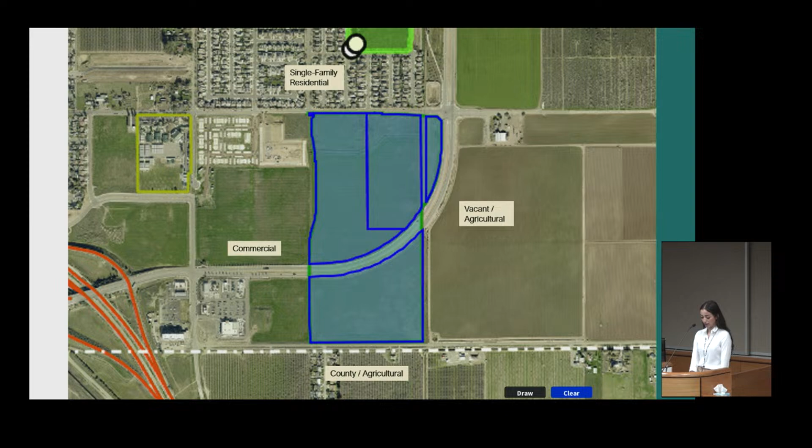This map shows where the project is located at a city-scale context at the southwest quadrant of the city limits. Here is a closer map of the location. As mentioned previously, it is located at the southwest corner of East Gerard Avenue and Campus Parkway. The site is approximately 73.7 acres with agricultural uses to the east, south, and some to the west, some commercial to the west, and single-family residential to the north.

The subject site was annexed into the city in 1999 as part of the Lyons annexation. This annexation incorporated a total of 565 acres into the city limits. The subject site has a current land use designation of business park and manufacturing/industrial and has remained vacant for many decades.

Next, I'll go over the entitlement applications for this project and what each is for.

The Planning Commission has the authority to make a recommendation to the City Council for General Plan Amendment number 2403, which would change the land use designation of the proposed residential areas from business park and manufacturing industrial to low-medium density residential and high-medium density residential. Establishment of Residential Plan Development number 83 would establish a new residential plan development for this area, and Zone Change number 435 would change the proposed residential areas to Residential Plan Development number 83.

The Planning Commission can make final action on Vesting Tentative Subdivision Map number 1333, which is to subdivide the 2 commercial parcels, park areas, and create 570 residential lots, and Environmental Review number 2430, which is a mitigated negative declaration.

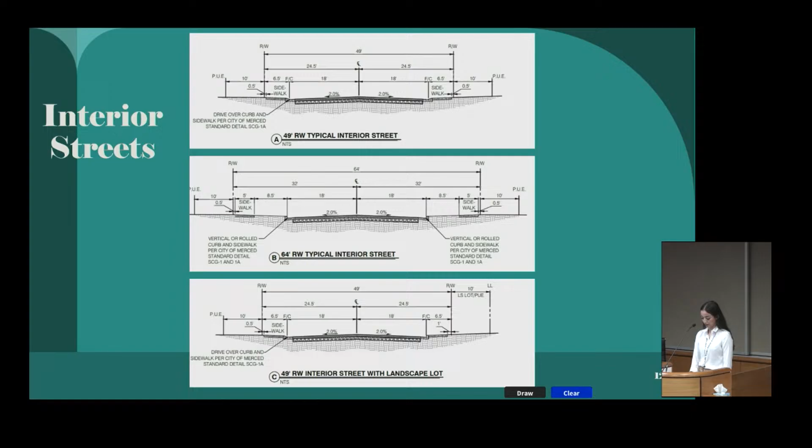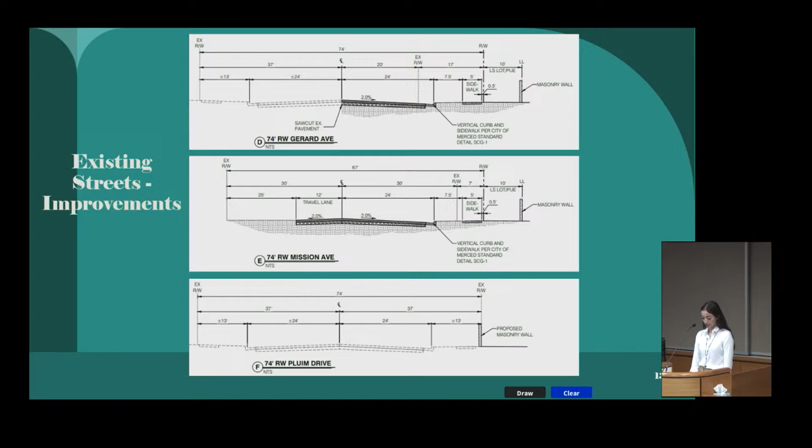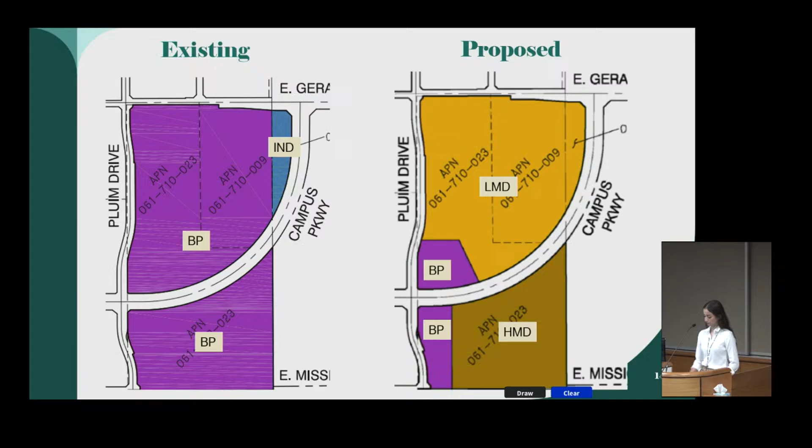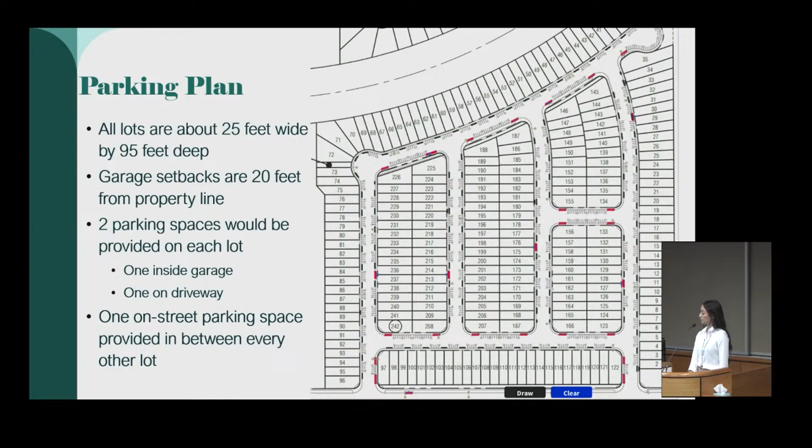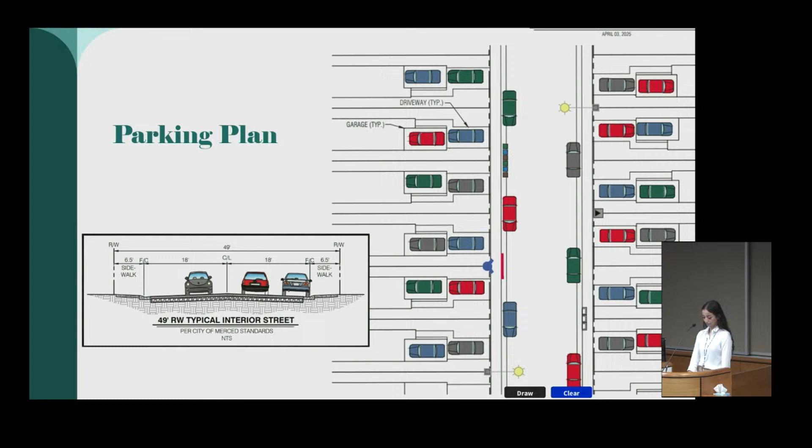The development standards for the low-medium density residential portion of the proposal would include single and two-story single-family detached homes with a maximum height of 32 feet. Each home will have at least a 2-car garage and 2 18-foot deep parking spaces for a standard size vehicle in the driveway. The house should have setbacks of 10 feet at the front yard, 5 feet at the interior side yard, and 7 feet at the rear yard.

The development standards for the high-medium density residential portion of the proposal would include 2-story single-family detached homes with a maximum height of 32 feet. Each home will have at least a 1-car garage and 1 18-foot deep parking space for a standard size vehicle in the driveway. The house setbacks include 10 feet at the front yard, 5 feet at the interior side yard, and 12 feet at the rear yard.

Both low-medium and high-medium density lots would have a 6-foot tall privacy fence between each home. These fences must not block the clear vision triangle of a public right-of-way or a driveway.

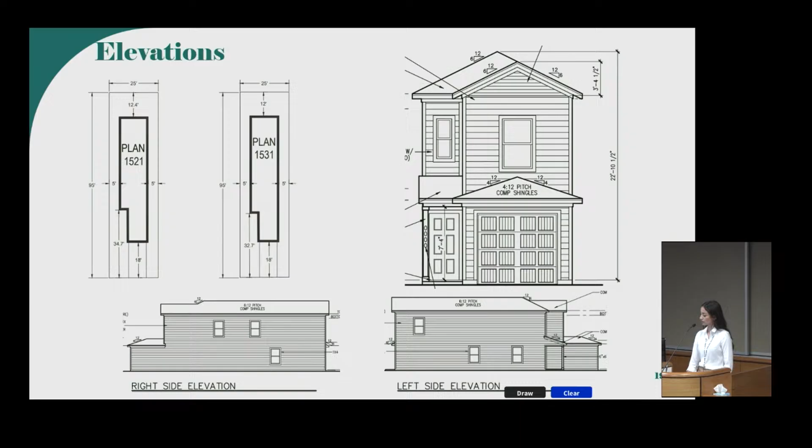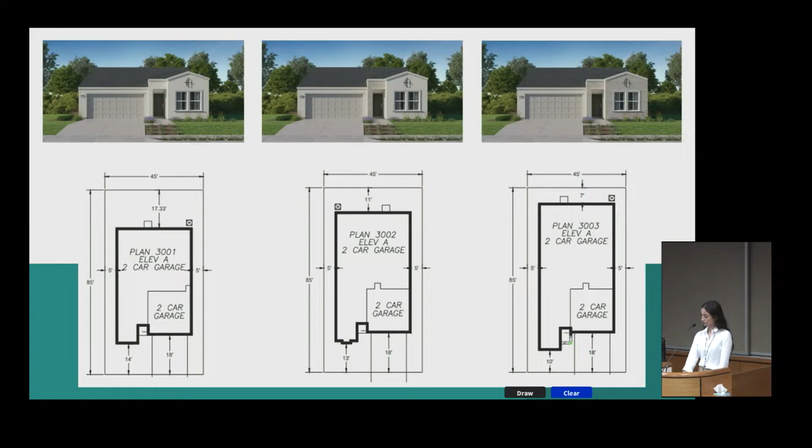Here we have more elevations provided for the 2-story, 2-car garage homes that would also be located north of Campus Parkway.

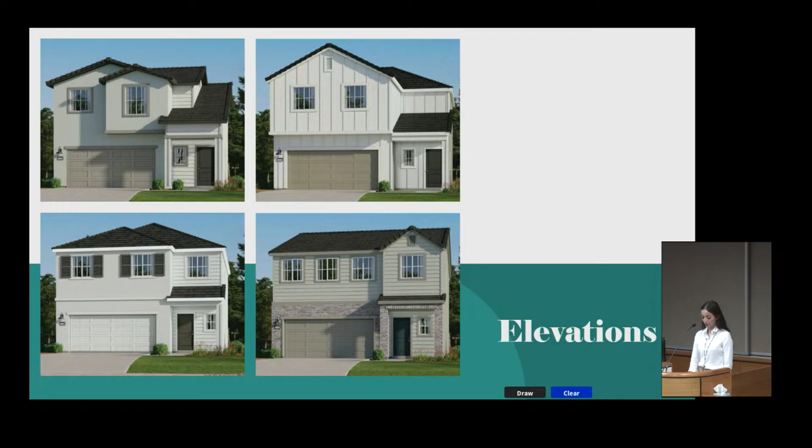Some of the impacts the neighborhood may have if this project were to be approved would include vibration and noise during construction. To limit this impact, staff has added condition number 39, which restricts construction hours to not take place between 7 p.m. and 7 a.m. Condition number 37 was also added to require an approximate 7-foot tall block wall along arterial and collector roads to mitigate noise levels from the roads to the neighborhood.

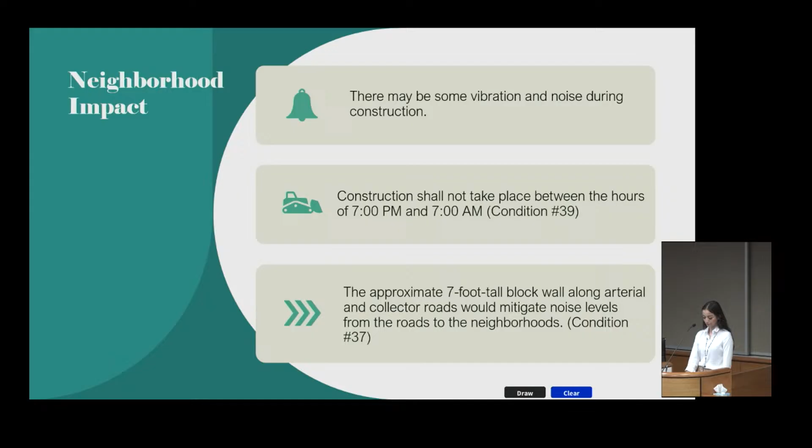Some of the notable conditions included in the admin report include condition number 15, which requires the developer to address general stormwater drainage on site unless approved by the city engineer or their designee. The developer would need to submit stormwater drainage plans and agreements, if applicable, with their final map application, all to be approved by the city engineer.

Condition number 35 reiterates that the vesting tentative subdivision map does not become effective until the general plan amendment, zone change, and establishment of residential planned development are approved by the city council. And condition number 44 states that any modifications to the street parking plan shall be reviewed by the Director of Development Services or designee.

There was also some changes to other conditions that Johnny will go over now. Thank you, Valeria. Staff met with the applicant, and we were able to work through a couple of the condition changes that I want to bring before you tonight.

So for condition number 7, we're going to change the condition so that the project shall comply with all requirements of the California Building Code and FEMA NFIP regulations for building and structures in special flood hazard areas.

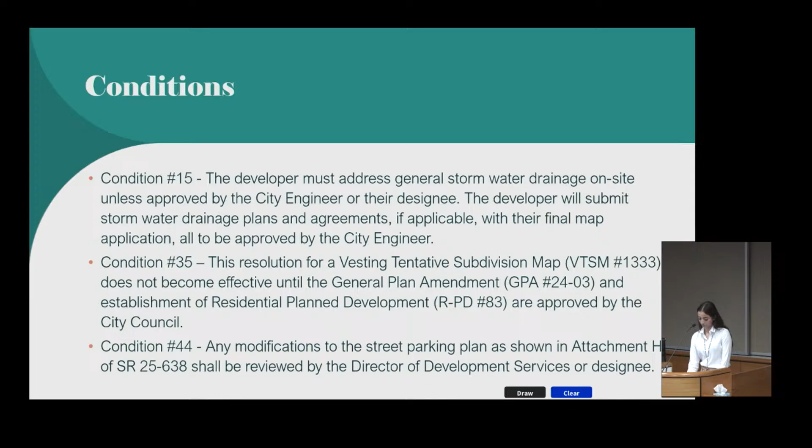After opening the public comment period, the Planning Commission may recommend the approval, modification, or denial of General Plan Amendment number 2403, Establishment of Residential Planned Development number 83, and Zone Change number 435. The Planning Commission may approve, modify, or deny Vesting Tentative Subdivision Map number 1333 and Environmental Review number 2430, which is a mitigated negative declaration. The approval of these applications is contingent upon City Council approval of the General Plan Amendment, Zone Change, and Establishment of Residential Planned Development.

That now concludes staff's presentation. I am available for any questions, and the applicant is also here.

Thank you, Valeria, for going through the presentation. Are there any questions for the project planner from the commission? Not at this time. I had one. Anybody have any questions? Okay.

Well, I have a question. I just wanted to, if you can, go back to the slide. I'm not too sure if it was in there. It said that there were some park areas. I couldn't really see where they were outlined on the grid.

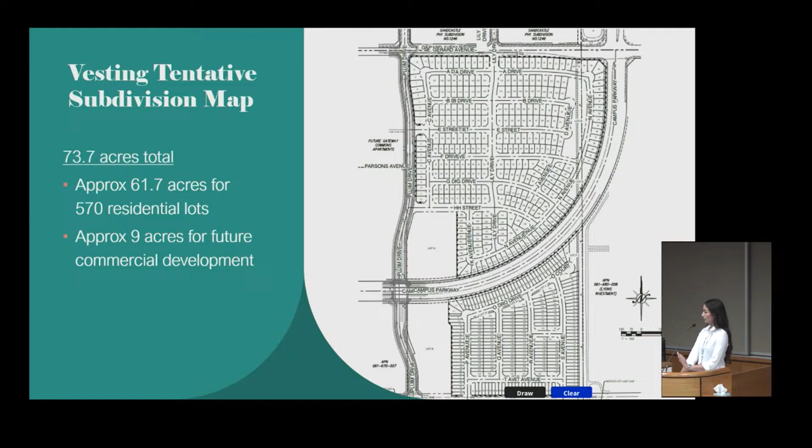So north of Campus Parkway, I'll divide it in two since the project is kind of divided, to make it easier to see. The park is at the northeast, in that kind of telephone shape. And there's a smaller portion south of that. This is the park area here. And then at the southern portion, it is Lot F at the top right corner, here.

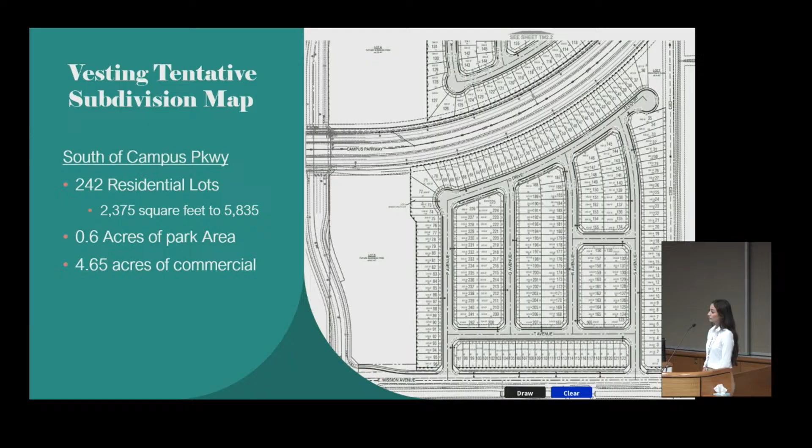Okay, perfect. Commissioner Swigert? A quick question. Are the park dimensions the same from the original commercial standing to now, as they want to rezone it for residential? Are they the same size as far as the dimensions? It's a half an acre, a little over half an acre to the south, and an acre and something to the north. I just want to make sure they're the same size.

They haven't been reduced. There are currently no parks located specifically on these sites. This is the first proposal we've had for this site in a long time, so the parks you see proposed are the parks they are planning to build. I guess my question was, was there anything proposed for parks prior to this?

Do you mean proposed to staff prior to this? Correct, pending. When it was zoned for commercial, was there any of the land set aside for parks? No. That's all I was asking. No, okay.

Commissioner Greggins: Since the topic of parks came up, I think our general plan says the parks must be developed at the same time as the project, right? But do we have any actual time limits on that, regarding whether it will be before permits, before model homes are built, before the first occupancy? Because we see a lot of previous developments where parks are kind of left waiting out there in the wind.

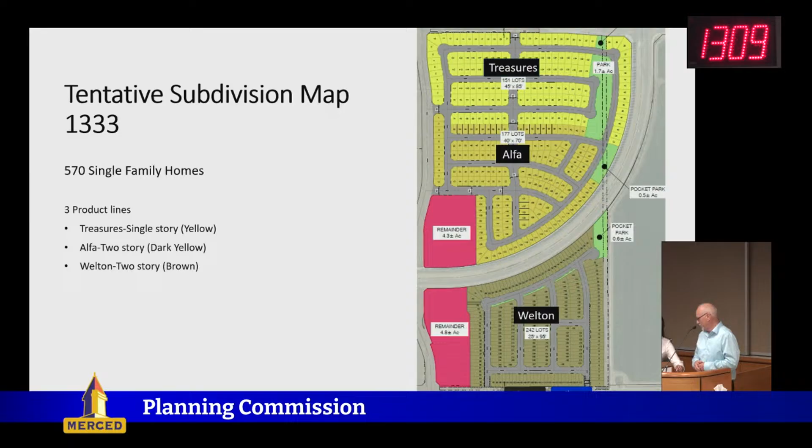So to get the density where we need to be for that zoning and to make the project work fiscally for us, that's a better application towards it. If you could go ahead and move forward on the slide, or do I push? Thank you, sorry about that.

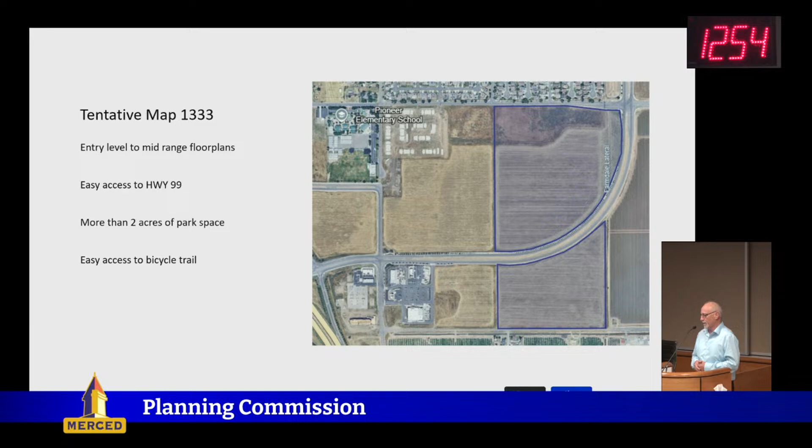So this is just the overhead, the aerial. You saw that in the presentations, obviously the ingress egress from Highway 99 and on through onto Campus Parkway, with easy access to bicycle trails. We're really excited about building along Campus Parkway there, being cognizant of the walls and also the access from Campus Parkway, more so from in-tract.

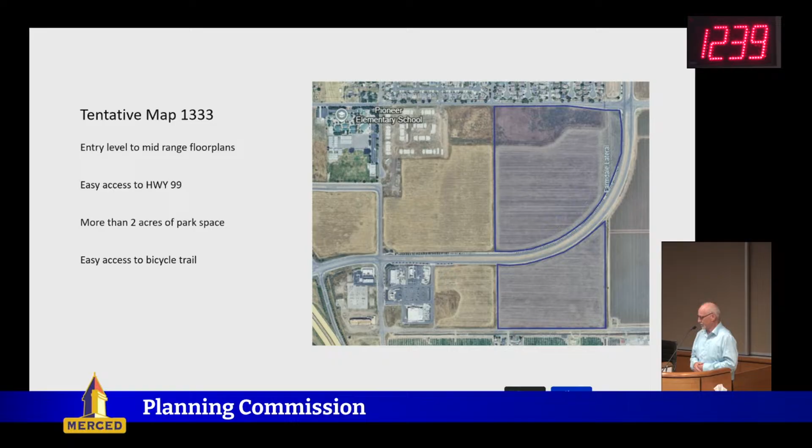This is our Treasures, which you saw earlier. We're selling really well with this and building really well with this, and the marketing comments on it are good, in Madera, where we've worked previously with the owner of the property on a couple successful projects in Riverstone. So we're building the Treasures out there. It's been received real well in Bakersfield, Madera, Clovis, and Fresno as well. We're really excited about that project and those single stories, which are really nice.

And then here's the plot plans and the product information. So of the Treasures on the low, medium, 151 units, and the lot widths and the height of the single stories, they're all single stories. These are the 3 individual plans for the Treasures, they're all the singles.

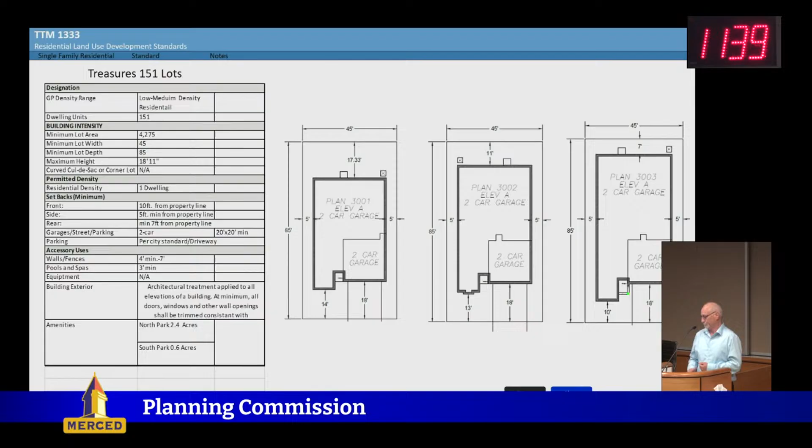This is the Alfa product with the 2-story option, for the higher density or lower density on the northern portion of the project. We've just started this product in a couple places in Madera County and Fresno County, and so far it's been received really well. We're excited about it. This is more of a move-up or family configuration, with 2 stories.

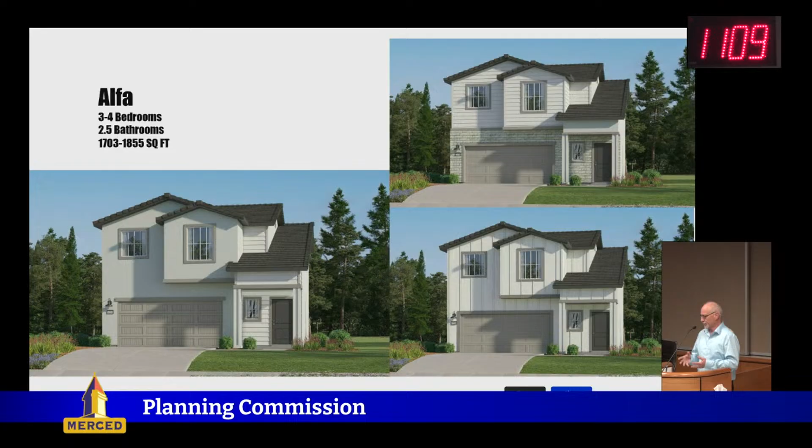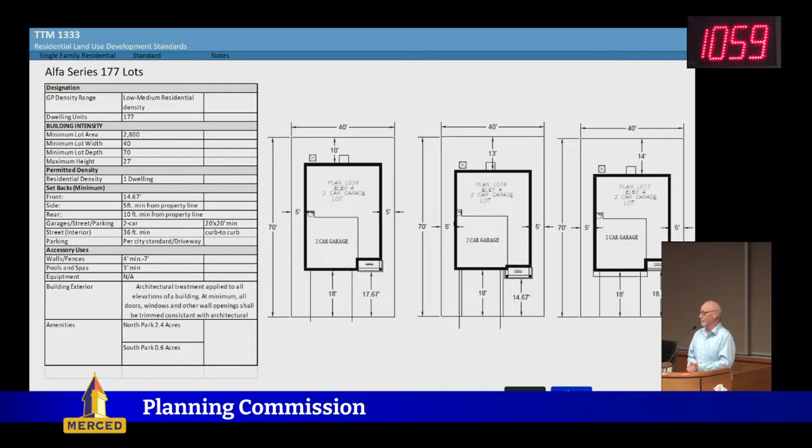Moving forward, we have the plot plans again, and the project information, 177 of the Alfa units. Lennar likes to have 3 or 4 different product lines spread around to spruce up the streetscape, with different elevations, to get out of the mundane and over-consistency, so a project doesn't look like it's all one class.

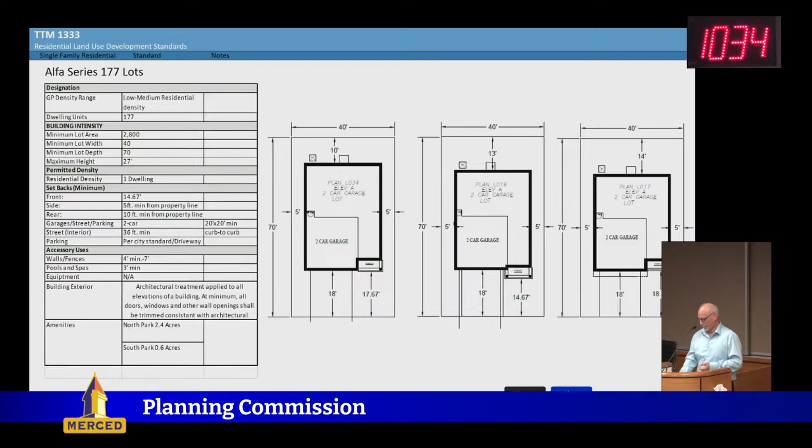Again, shows the parking and how that works. So you have that deep enough driveway to put a truck on it. You have a driveway, you have the garage for another car, and you have the additional 143 parking spaces outside on the streets for the entire section of south of Campus Parkway.

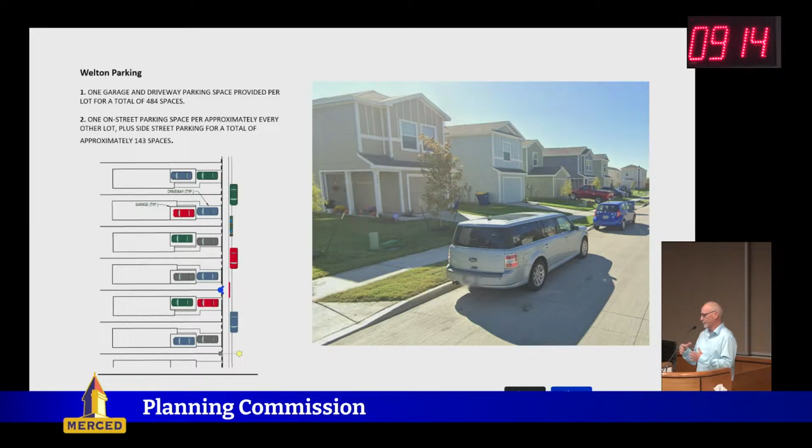And that would be it for that. Can I help answer any questions? And then I know there was one question, if you can remind me what it was, about timing. What was it? Somebody had a question. Yeah, go ahead, Commissioner Gergens.

I had the question regarding the parks. As you are building out the developments, when do you foresee the parks being completed? We don't want to be, like you said, late-enders. We kind of have an in-house division company policy: we want that park done before the first occupancy.

Before the first occupancy? That's our goal. That's how we work. And sometimes we don't get there. Maybe there's a permit that has to be pulled for playground equipment, or some unforeseen delay, but it never really delays us much longer beyond the goal of delivering parks for people when they first move in, so they have a place to go with their families. I have a nice little pocket park where I live in Fresno, and it's just great to have it.

So we want them to enjoy it right from the beginning, that's our policy. Would you be opposed to putting that into condition 42, that we have the parks built out before occupancy? How about by the first occupancy, just to be safe, for problems that could arise? No, condition 42, not the number of houses built. Would you be against putting that as a condition, that you would have the parks built by the first occupancy? I would not be opposed to the condition, but I think there should be some language modified in there for things that could come up that I can't control.

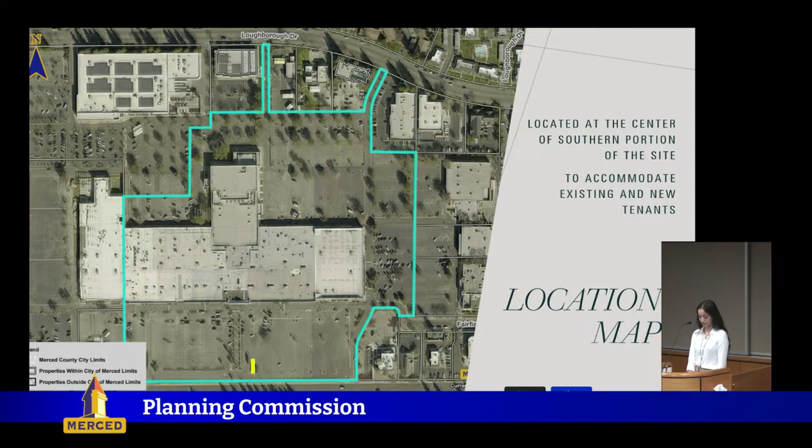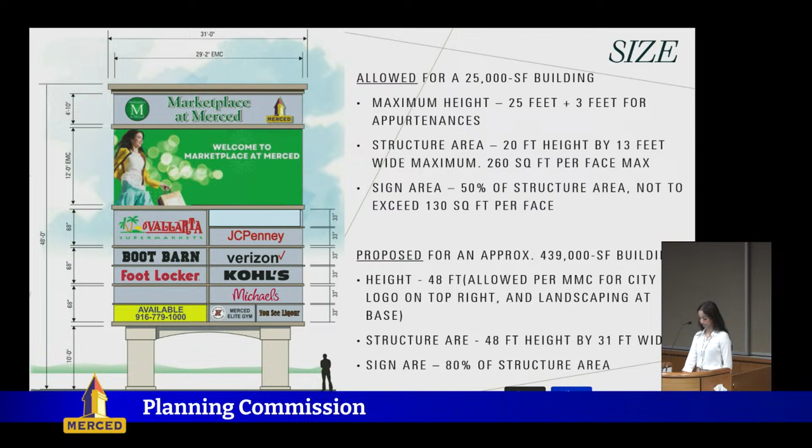These are some of the conditions outlined in the staff report. Condition number 9 states that all existing landscaping shall be kept healthy and maintained, and any damaged or missing landscaping shall be replaced immediately. Condition number 11: the city may use the digital screen to advertise city or community-sponsored events pursuant to section 20.62.140B4. Condition 13: no portion of the digital sign shall flash, blink, or include video display. Condition number 14: the sign shall not emit any audible sound, buzz, or noise. Condition number 15: the sign shall be limited to advertising uses related to the premises on which the sign is located.

Staff prepared a memo available for the commission, public, and on the record, requesting the commission consider some changes made to the categorical exemption posted as attachment D of the staff report. After the planning commission opens the public comment period, the commission may approve, modify, or deny conditional use permit number 25-0007, site plan review number 25-0009, environmental review number 25-0017, with the revisions requested by staff. That concludes my presentation. I am available for any questions. Thank you, Valera, for your presentation.